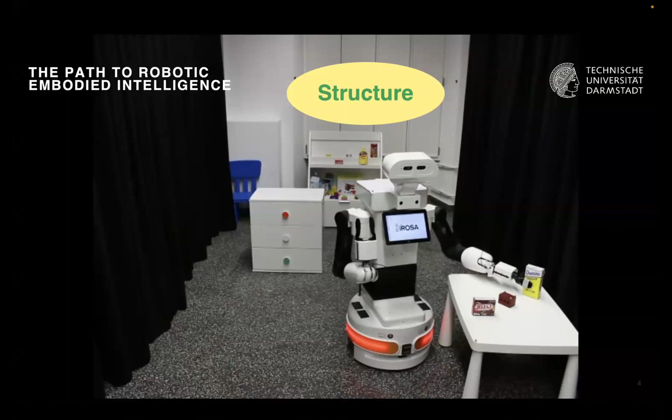In my research, I want to explore robotic embodied intelligence, not necessarily from the language level downwards, but also the other way around - how you can start from a bottom-up approach. I don't know what your opinion is, but I think grounding comes from the geometry, and then language comes on top as a semantic layer.

So if we look at the structure on different levels, what we would like to use to accelerate our learning and planning processes is a good representation on top of which we can do efficient and safe learning. We want to effectively coordinate the robot, especially for bimanual mobile humanoid robots with 20 degrees of freedom - you want them to coordinate with respect to themselves and the task they have to solve, and swiftly navigate the environment without needing millions of demonstrations, doing active exploration to balance objectives of understanding the scene while still being efficient in solving the task.

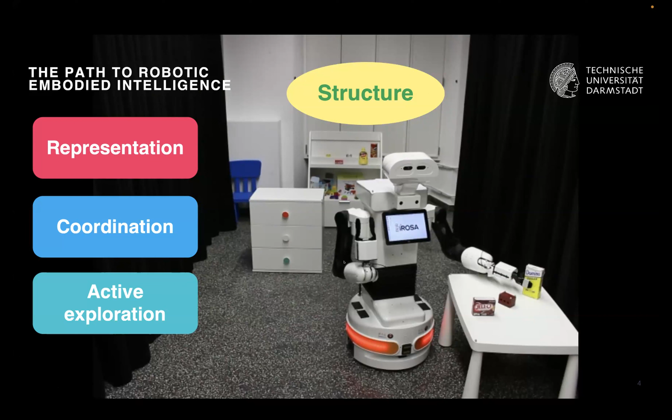You don't expect a robot that is a mobile manipulator in your house to spend 15-20 minutes just scanning the environment to map everything. So there should be a stopping criteria somewhere there.

In the first part of the talk, we will see how we can use topology of constraints in order to learn to act safely. For that, neural representations have been very actively used in the last 2-3 years or more, and in particular we started looking into signed distance fields, because naturally in robotics, signed distance fields are a good objective for formulating obstacle avoidance objectives in control and planning. Therefore, it makes sense to use neural representations of these implicit functions.

We lift them into more high-dimensional and complex manifolds, like this 20 degrees of freedom robot, where we change the deep signed distance field architecture into one that can afford to compute the distance field of the robotic body at any configuration of the robot. So it can interpolate basically on all possible poses - instead of training one distance field per object, you're basically training for the articulation of the robot.

Additionally, we added a regularization in the training objective, where it would understand and switch between representing an object you are interacting with as a Euclidean ball, into collapsing into the manifold that represents the object's geometry.

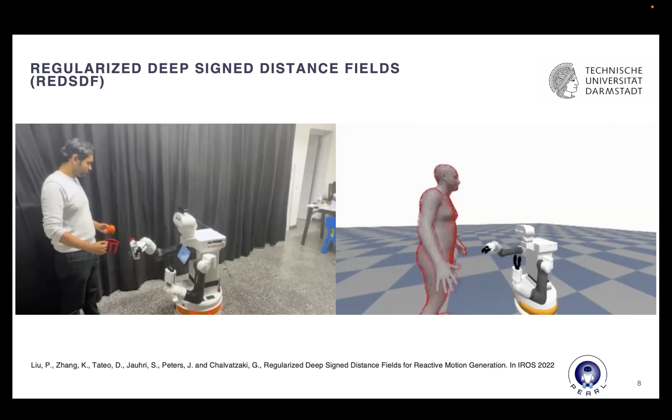What is super efficient is that you can query this neural network in batch, in real time, from a number of cameras, trying to estimate human poses. And then you want eventually to use this for safe planning for the interaction. You can see this as a safety layer when you want to interact with humans.

So in order to learn how to interact safely, especially if we consider dynamic environments, we naturally looked into safe reinforcement learning, because it's not always easy to have explicit dynamics for this kind of problem. Instead of treating the problem as in most safe reinforcement learning approaches, where you put the constraints as a cost, or create a safe set that filters out possible actions, what we did is consider that we have an affine control system and some constraints that may be the inherent constraints of the robotic system, or may come from obstacles in the environment that you want to avoid.

We created the constraint manifold, where if you also put slack variables, you can have inequality constraints. What we did is try to change the action space of the robot and map it onto the null space of this constraint manifold, such that all your actions are always tangent to this manifold. This means you strictly restrict your actions to locally never violate the safety constraints.

This is like a swift transformation that you can have, subject to the constraints, and you can also deploy the learned distance fields, because you have access to the Jacobian, and then learn, for example, to do some sort of dynamic manipulation in narrow environments like this bookcase, and transfer it to the real world without much loss in performance, because you have this topological transformation all the time.

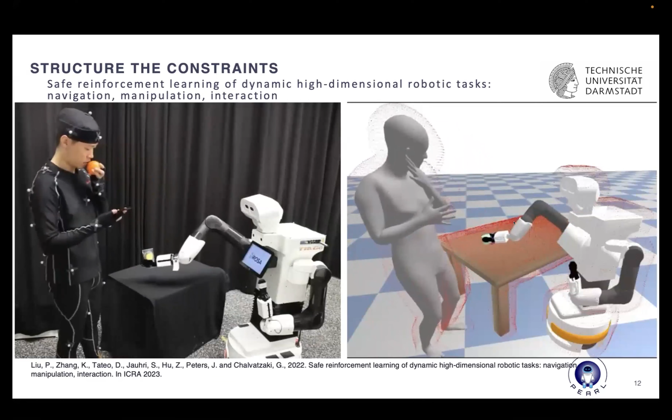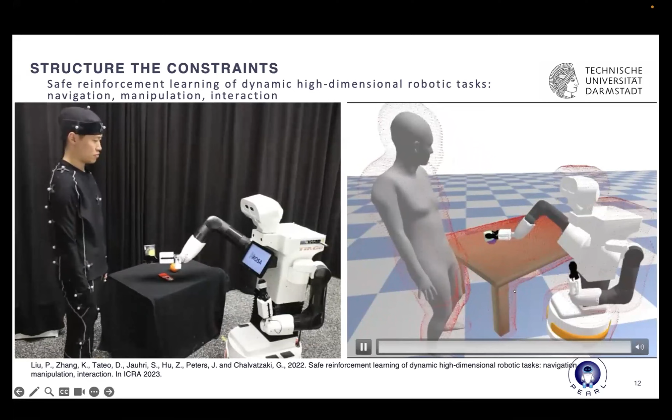What is super interesting is that we can use it to also interact in the proximity of humans. In this task, the robot had to deliver this cup upwards. This is one of the objectives of the task, so it is considered as a constraint. It has to deliver it in this position while avoiding collisions with the robot itself, with the table, and with the human, who is doing random actions.

We have done this several times, and I think only once in many experiments did the robot overturn the glass, but it never actually collided with the human or the environment. So in some sense we prioritized these constraints, such that achieving the goal has the lowest priority relative to the constraints.

Of course, this is one way of seeing these problems for low-level control, but usually we need to guarantee some sort of safety even one level higher, when we are doing planning. So the question is, how can we represent objectives in the proper topological space such that we can ensure efficient planning?

For this, there is a line of work we have done since last year, starting from energy-based models, where we proposed learning energy-based models as implicit priors, or cost functions for optimization. We assume we have multimodal demonstrations of tasks going to different multimodal goals, and we learn a landscape of these demonstrations so that we can use it, from a planning-as-inference perspective, as a prior, or from a trajectory optimization perspective, as a cost in the optimization.

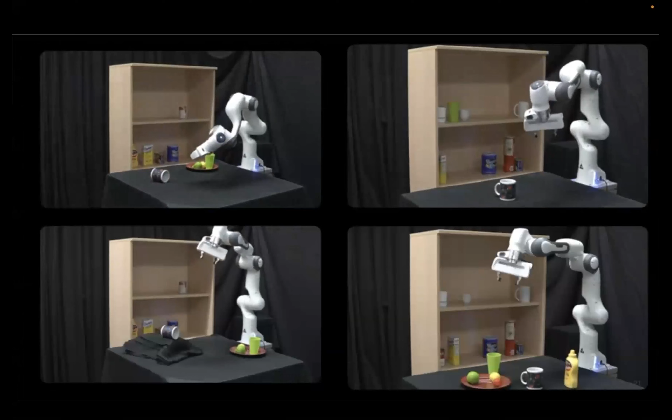Here we only trained for grasping, while we hand-designed the distance field-based costs with the obstacles, and you can very nicely generalize as long as you have a representation of the scene. So you need a pose-based representation, and you can also combine it with placing objectives, with respect to how the object is placed in the scene. You can place it effectively with this joint single pipeline of optimization without having to decouple.

First, let's sample a few grasps, and if these grasps succeed, that is good, and then we have to do the placing and so on. Here you can have a single pipeline. But of course, this is very local, and as I said, I am interested in mobile manipulation.

So we also recently did a different work on how we can grasp in cluttered scenes, especially considering a mobile robot that only has an embodied camera with a partial view of the environment. In general, as a human, if I see this glass, I have a mental model, and even if I don't see everything, I'm able to complete the information in my brain. We wanted something similar for the robot, so it doesn't lose too much time in exploration.

You will see in a while in the last part of the talk how this actually connects. We want the robot, from any random viewpoint, to be able to understand the scene and grasp objects even with partial information. For that, we reimagine grasping as rendering, taking advantage of neural surface rendering approaches.

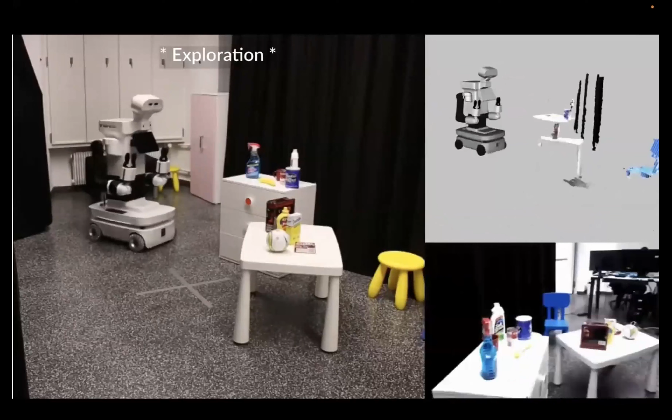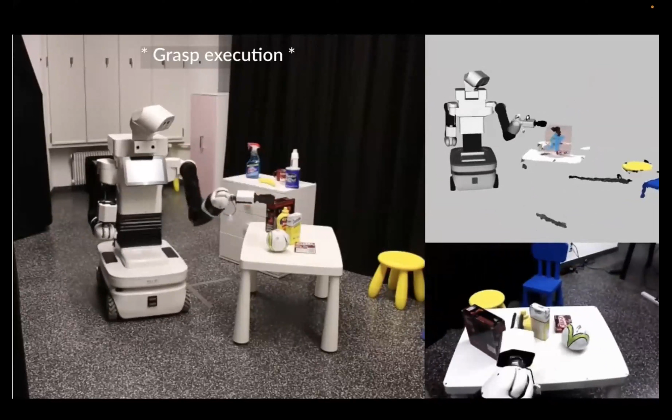And we transferred it also in the real world. So we had an initial phase of exploration for locating the bounding box, so we deployed Mask Former, I think, for the semantic kind of detection. After that, the agent was only moving with point cloud based information.

You see also, I think it's very small there, the information gain that it discovers in order to grasp objects that are in clutter. So we can rearrange this, put also more clutter around, and the agent is able to detect, do the semantic detection of the object it needs to grasp, and then explore a bit and eventually go and perform the task.

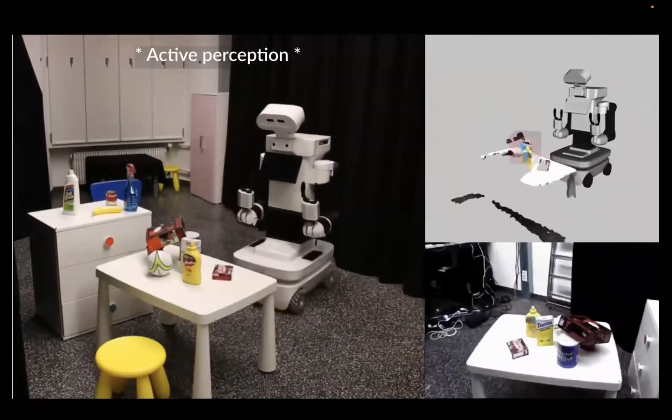So I will let this play, and I will be done now.

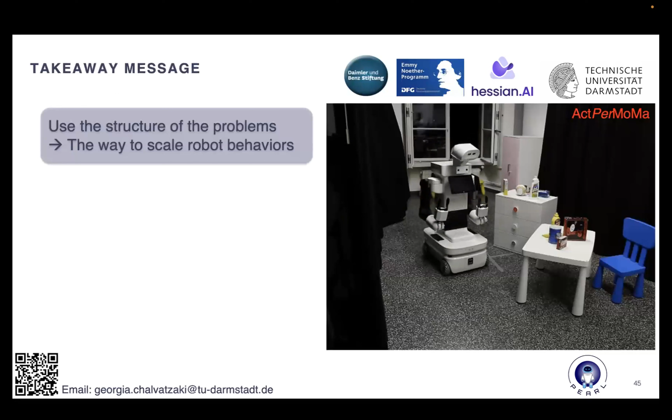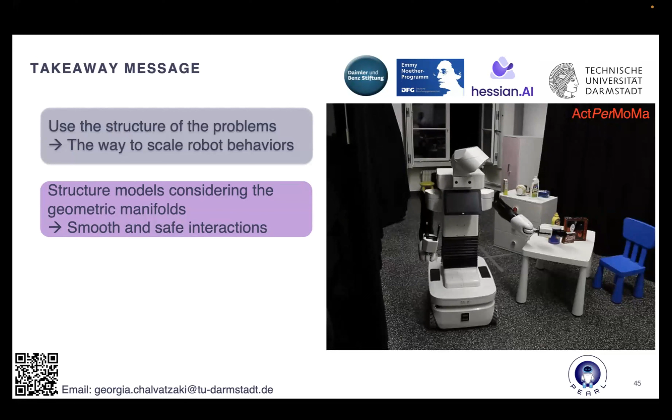This is work, of course, done with my collaborators, and all the shout out goes to them. As a final takeaway, I think we need to reconsider how we use the structure of the problems, and effectively how we can use geometry and geometric manifolds. I think this is also something to consider now with pre-trained models that are basically scaling down problems into the 2D space, which in my opinion will not allow generalization into the 3D space unless we combine them with some additional geometric prior. I think we should focus on more challenging kinematic structures like mobile manipulation, because they are a very good example for achieving embodied intelligence.

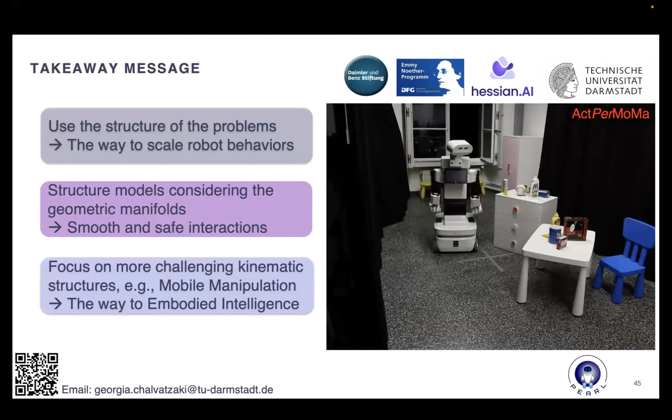So yeah, thank you for your attention. Time for questions.

When you're reasoning at a scene level, do you decompose the scene into individual objects? In both works, no. In the neural network approach, you assume this has been done inside the network from the way it has been trained, and you also impose some sort of equivariance from the way you train and generate the data. Here you only assume you know the bounding box of the single object you want to find and grasp. So once you go towards this object and start querying grasps, it goes up to the planning stage to plan collision-free grasp without caring about the notion of objectness of the other objects. It would be interesting to think about whether it would be needed or not.

Chad, you wanted to ask something? Oh no, I thought you were. No, I'll ask you. So when you grasp, you have to think about the next action. Yeah, next action. How does that change? How do you think about that?

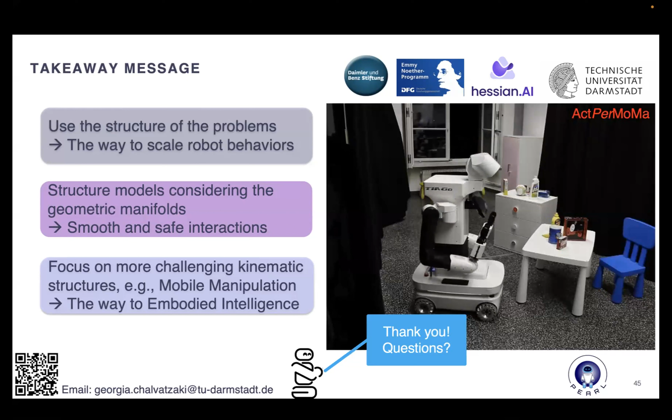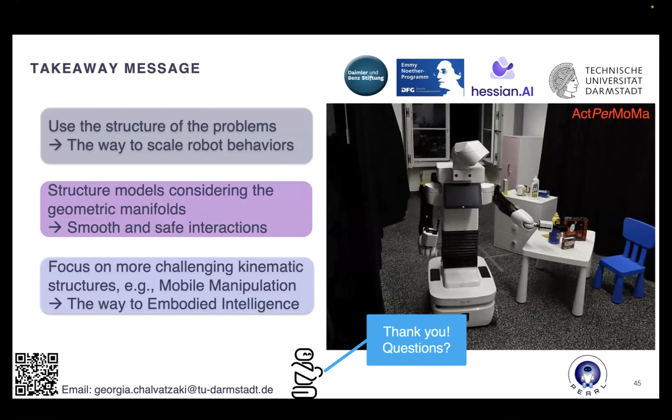It's a question. From my point of view, pre-trained visual language models have a very great application at this higher level of designating which object, and how the goal should be specified in the 2D space. Then you can have another layer that handles the geometric processing of how you execute it in the 3D world. So it's also a question of efficiency. If we put potentially an inductive bias on these models, it would be interesting to see if they can really correlate well. But right now, what's happening is the attention focuses on some features on the 2D plane that also have some semantic meaning, and most tasks are basically very tabletop. So we don't really make the leap to the next phase, but that's research—this is our job. Thank you.